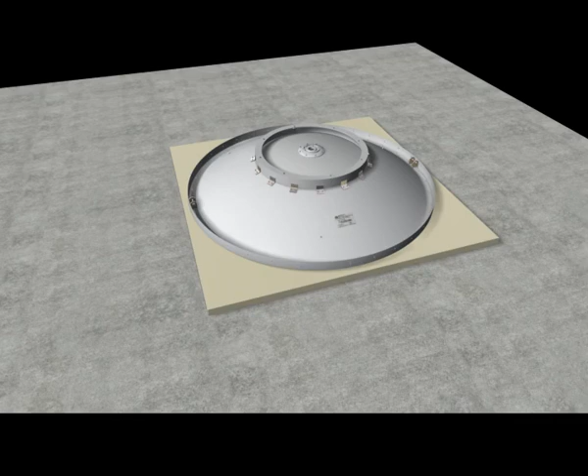Installing a 1.8 meter antenna.

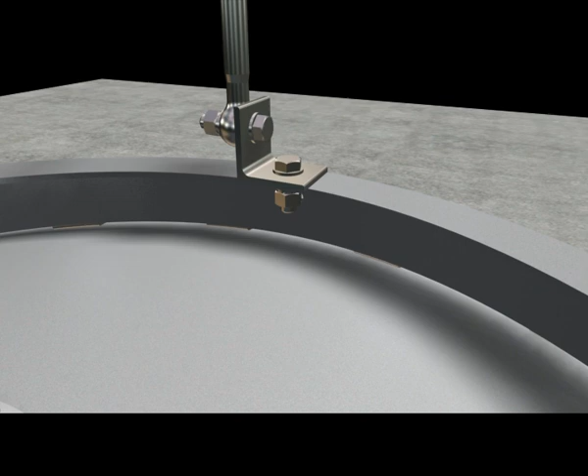The shape and outlet of the feed shown in the figure may vary with the model of an antenna. This does not affect the installation of the feed.

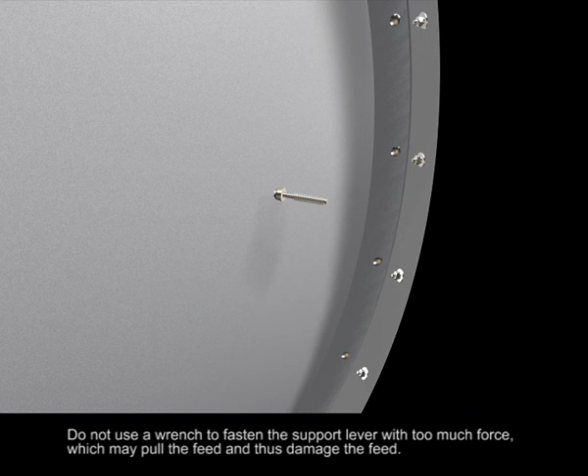Do not use a wrench to fasten the support lever with too much force, which may pull the feed and thus damage it.

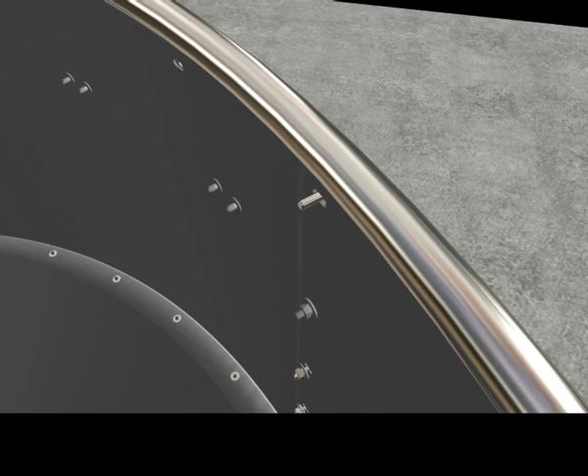Take anti-rust measures, such as painting with grease.

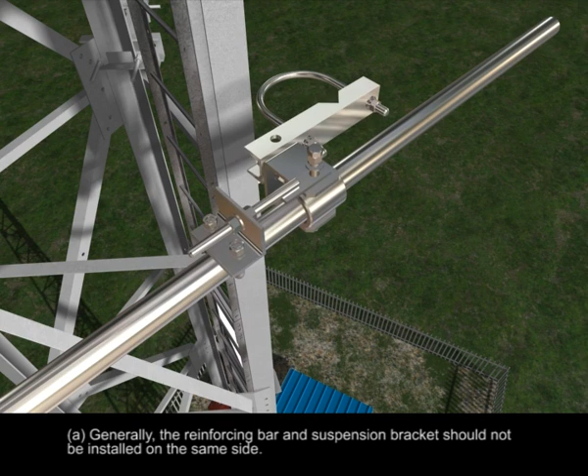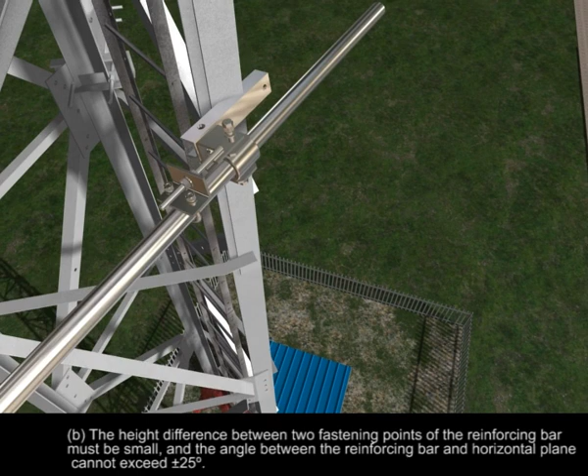Install the reinforcing bar in time after hoisting an antenna to ensure that the reinforcing bar can support the antenna properly. Note the following: Generally, the reinforcing bar and the suspension bracket should not be installed on the same side. The height difference between the two fastening points of the reinforcing bar must be small, and the angle between the reinforcing bar and the horizontal plane cannot exceed plus or minus 25 degrees.

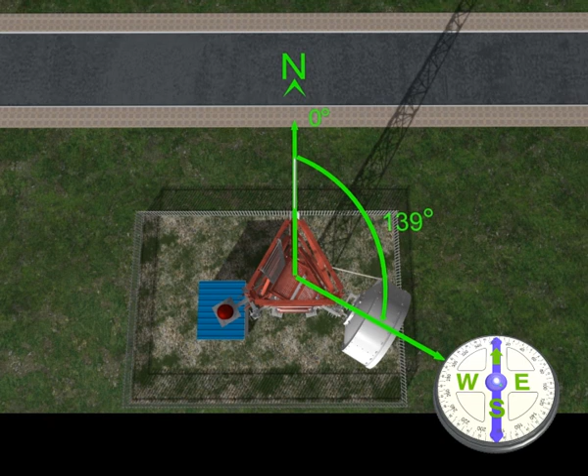Adjusting the azimuth of the antenna.

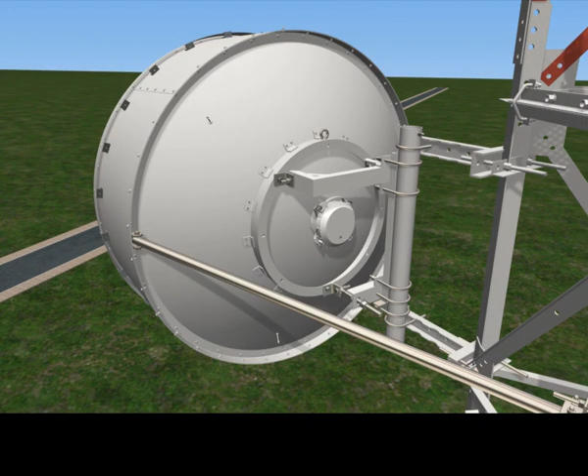Adjusting the elevation angle of the antenna.